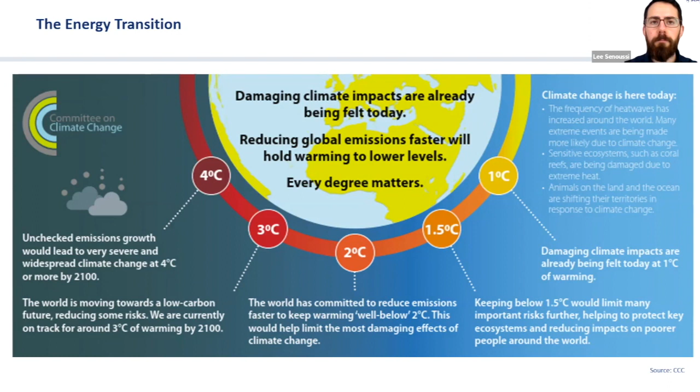I mean, you could say that the UK is a relatively low emitter of greenhouse gases on a global scale compared to the likes of China, USA, Russia, and that the steps that we take are insignificant in the grand scheme of things. However, my opinion is that over the course of history, the UK has been a consistently relatively high emitter of greenhouse gases, and it's up to us to show our pioneering spirit and lead the way in this energy transition.

And this is exactly what the representatives of the UK and Scottish governments are doing. Last year, the Scottish, Welsh and UK governments were among the first to declare a climate emergency and followed this through with commitments and legislation to reduce greenhouse gas emissions to net zero by 2050, or 2045 in Scotland.

Now, this sounds like a very tough ask for a nation that emits over 350 million tons of CO2 equivalent every year. But the good news is that we've already reduced our emissions by over 40% since the 1990 levels, whilst growing our GDP by up to 78%.

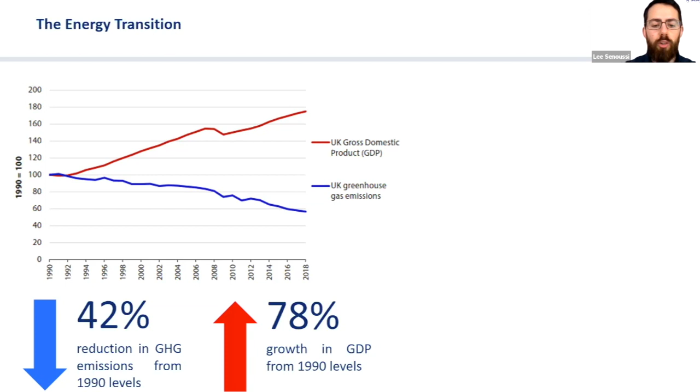So by being a front runner in this movement, we can become a nation, a leading nation with knowledge, skills, and technology that we can export globally. This is a strategy that's already been recognised by Oil and Gas UK and outlined in their Roadmap 2035, and it's further highlighted by the formation of groups such as the OGTC's Net Zero Solution Centre.

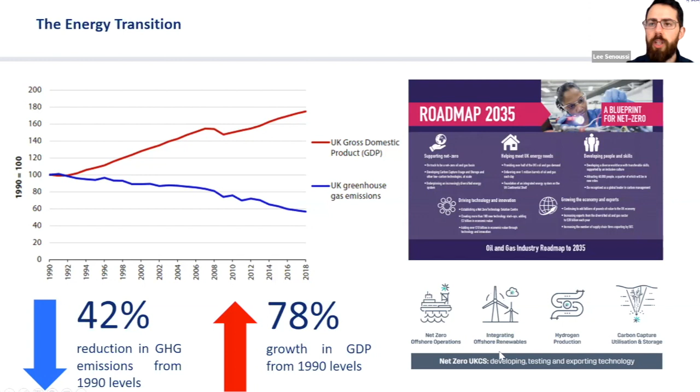So these 2 points on the left, the net zero offshore operations and integrating offshore renewables, are where I'm going to focus my presentation today. So taking a slightly closer look at the UK's oil and gas industry, the production of hydrocarbons accounts for almost 3% of the UK greenhouse gas emissions. That's over 14 million tonnes of carbon every year. And almost 3/4 of this comes from power generation.

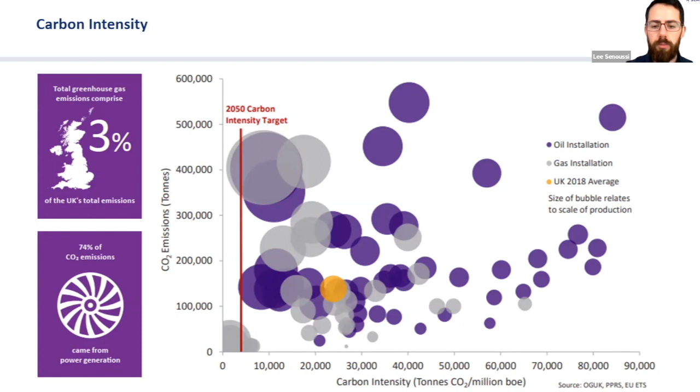The average, shown by the orange bubble, for the UK continental shelf is 21,000 tonnes of CO2 per million barrels of oil. So this is higher than the European average, which is around 11,000, and even the global average at 18,000. When we compare this to our Norwegian neighbours, they produce oil at an average of 9,000 tonnes per million barrels of oil. And this excludes the recently commissioned Johan Sverdrup field, which will bring this average down even further. The red line in the graph shows the target for the UK oil and gas industry, which is to reduce our emissions to 4,000 tonnes per million barrels of oil.

Okay, so this brings me nicely on to what I'm going to talk about today. So as Roger mentioned, last year, in conjunction with the OGTC Net Zero Solution Centre and its members, Sealand studied a cross-section of major oil and gas assets within the UKCS to understand more about the power generating challenges involved in extending the life of the viable assets beyond 2035.

So we explored 3 different case studies. The first investigated the immediate gains that can be achieved by increasing the operational efficiency of one's own generating plant. So this involved completing a cost-benefit analysis to interconnect 2 North Sea assets against a number of COP dates. The second study looks at providing autonomous power to the oil and gas facility by developing an adjacent offshore floating wind farm. As well as performing an assessment on the technical, environmental, and consenting, we investigated the life cycle costs of this method, allowing us to compare levelized costs with the platform's current mode of operation.

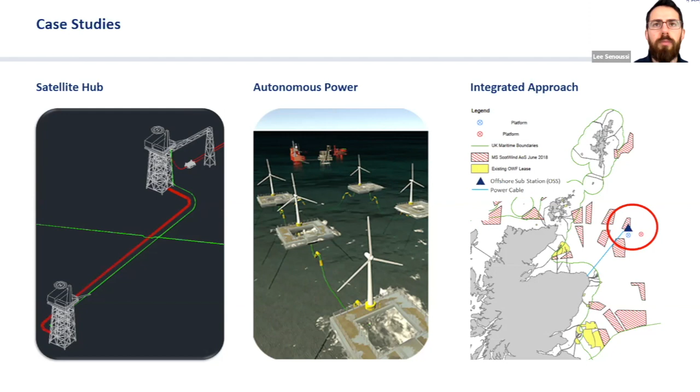Third and finally, we looked at the outcomes from the autonomous power study and drew up a hypothetical scenario in which we applied a more integrated and phased approach that could provide cross-industry benefits. So starting with the first one. So here we took 2 North Sea oil platforms located approximately 10 kilometers apart. They were in the fortunate position to be rich enough in fuel gas that they could power their gas turbine and diesel generators from this.

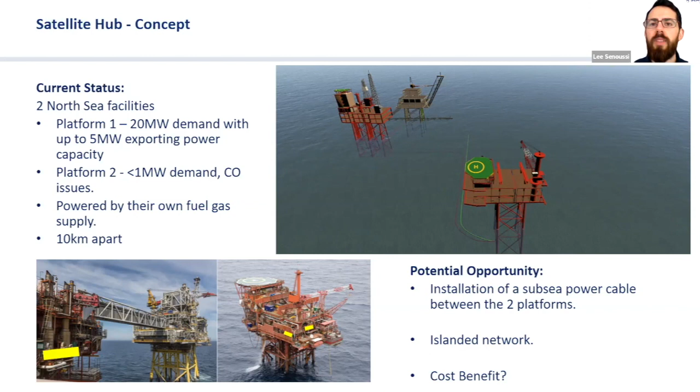Platform 1 is a larger platform with a demand in the region of 20 to 30 megawatts and an excess generating capacity that allows it to export up to 5 megawatts of power. Platform number 2 is a smaller platform with a demand of less than 1 megawatt. This platform's also got some known HSE issues in the form of carbon monoxide emissions, which are a result of the gas turbines. So the operator here wanted us to consider the relative costs of replacing the gas turbines on the second platform with a potential opportunity to install a subsea power cable between the 2 platforms, making use of the overcapacity of the first platform and creating an islanded network. And the question is, could this be of a cost benefit?

So our assessment showed that the solution could be implemented within a 2-year time period from concept to operation. And in terms of costs, we modeled 2 scenarios. On the left, scenario 1 accounts for a cessation of production of 2026, which was modeled to reflect the calculated return on investment of 5 years at a capital expenditure of 7.7 million.

On the right-hand side, we looked at a second scenario which pushed production out to 2031, giving 10 years of operational field life for the cable and a cost saving over that lifetime of around 7 million.

So in terms of some of the challenges and benefits of this option, providing a seamless transition to the new power source was always going to be a challenge in minimizing the operational downtime from switching between one source to another. This option also needs a number of topside modifications, including step-up transformers and modifications to switch rooms and electrical components, which needs available deck space, which is a bit of a premium on these platforms.

Additionally, there's a bit of an appetite to risk within the oil and gas industry, and it's generally thought that some sort of backup generation would be required in case there's a fault with this power cable.

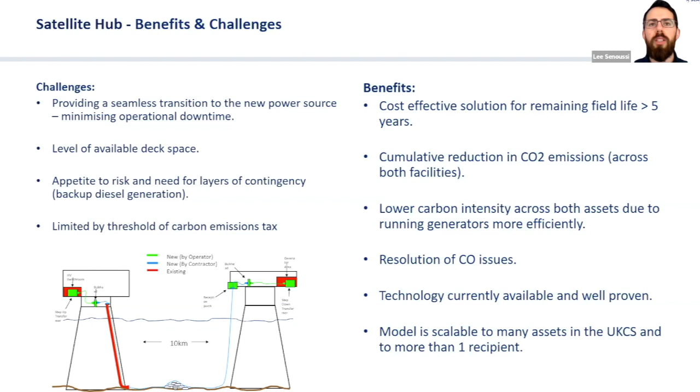So the second case study looked at 3 North Sea assets that are around 160 kilometers from shore. Now they've got a peak power demand in the region of 40 megawatts, and they're all powered by gas turbine generation. However, in this case, the facilities are gas deficient, so they're reliant on the importation of fuel gas, which is costing them a significant 30 to 40 million pounds a year.

Combined, the fields emit almost 500,000 tons of CO2 every year, and our study here investigates the potential opportunity to develop a floating offshore wind farm adjacent to the oil and gas assets, capable of powering some or all of the platform's power needs. Yeah, and we try to answer the question, can this be cost competitive?

So this slide here shows a typical timeline for the development of a floating offshore wind farm based on industry data. We also engaged with the developers of some of the demonstration sites for floating offshore wind, and the feedback we got is that this timeline is actually quite ambitious, and it's typically 8 to 12 years is what we're looking at. This can be down to the long regulatory consenting and approvals processes that are needed, generally within the first 2 to 4 years.

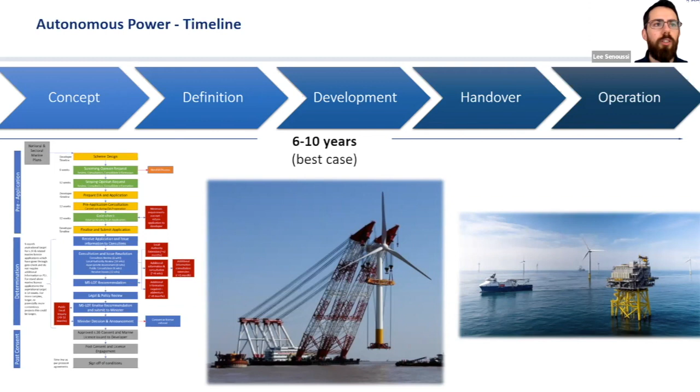Okay, so first of all, I'm just going to focus on the current operating costs of the platform. So this is current operating costs using the gas turbine generators as they are at the moment. So we were able to determine a baseline levelized cost of electricity for the platforms, calculated at £157 per megawatt hour, which I've highlighted in the table there.

So that's our baseline levelized cost, but we also recognize that there are key sensitivities that can cause this baseline value to fluctuate higher and lower. So the first one is the price of gas. The spot price of gas fluctuates throughout the year, and typically operators who are reliant on fuel gas pay anywhere between 1.5 to 3 times the national balancing point of gas, which at the time of the study was about 35 pence per therm.

So the operators are paying a lot of money for their imported fuel gas. And the second aspect is the cost of carbon tax. So we completed this study based on the cap and trade scheme in line with the EU emissions trading scheme, the EU ETS, which showed a rise in carbon tax periodically.

So since leaving the EU, however, we will have to develop our own legislation for how to manage carbon tax. For the moment, it's been set at a relatively low £16 per tonne for the interim period. However, with the country's drive for net zero, this is almost certain to rise, which will have a big impact on some of the larger oil and gas operators. And, for comparison, when we compare this to Norway, at the moment their carbon tax is set at €80 per tonne.

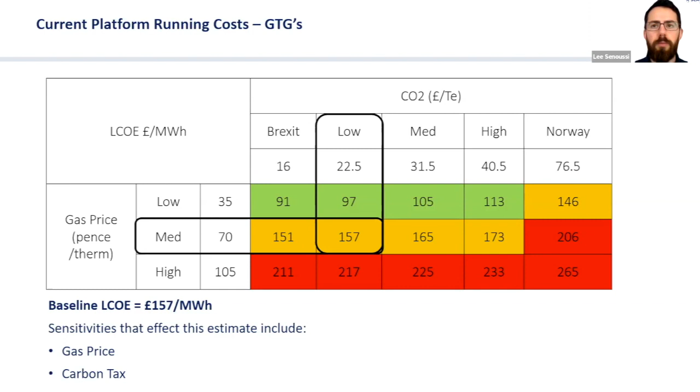Okay, so the question here is, how does our floating offshore wind development compare to our current baseline costs? So in the top right corner, I've kept the current levelized cost for the platforms as they are at the moment for a comparison. And then in the table in the middle, tried to show some of our workings. So first of all, we calculated the capex costs for the development of the 6 10 megawatt wind farm, which we worked out as roughly £350 million. We apply this to an operational timeline of either 10 or 25 years, and then we can calculate the levelized cost in a range of between 170 to 250 pounds per megawatt hour.

So there's quite a large variation, and it can be attributed to the weighted average cost of capital. So essentially, this is a figure that reflects how much risk the financiers consider the development to have. The other factor is the operational time. So with a longer operational timeline, it provides a longer period to realize the benefits and bring down that levelized cost. The bottom 2 rows in the table work back from a levelized cost of £157 per megawatt hour. And the idea of this is to demonstrate the capital expenditure for the development in order for the development to be competitive.

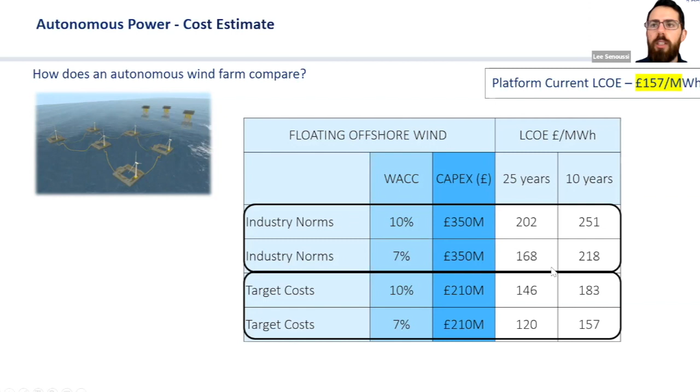So the next slide, which I won't go through in great detail, shows a breakdown of our capex costs and identifies some of the key areas for potential cost reductions to achieve a more competitive levelized cost. These slides will be made available after the session for you to look at these figures at your leisure. But essentially, what we've identified is the foundations and mooring systems are some of the high cost potentials that we think could be improved.

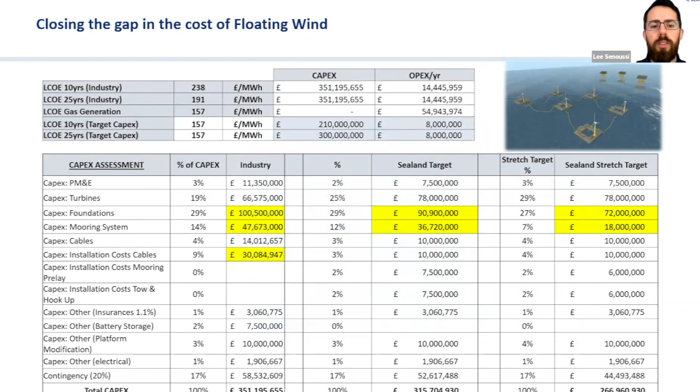Okay, so this one is just a quick slide here to show where we currently are with floating offshore wind and the ambitions of Equinor, who are on a mission to become the first developer to develop a commercial scale floating wind farm. So they're targeting a levelized cost of between 40 to 60 euros per megawatt hour by 2030, which is very ambitious. And it's actually in line with what we're currently seeing for fixed bottom offshore wind farms at the moment.

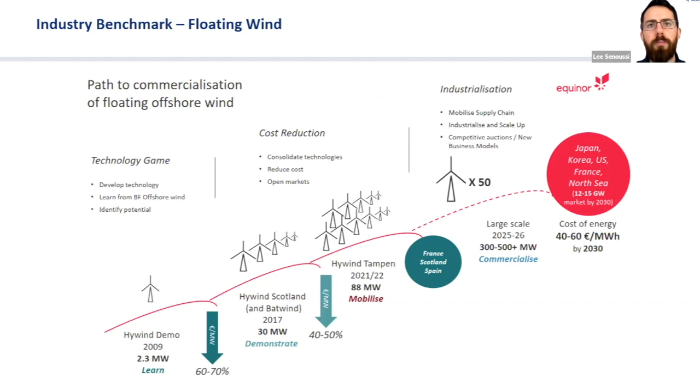So again, talking through some of the benefits and challenges of this option, the obvious benefits are the displacement of CO2. So we're talking, for this case study, around 350,000 tons of CO2 displaced every year. That's about 80% of what it's currently running at, bringing down the carbon intensity in line with net zero strategies. It also gives oil and gas operators an opportunity to expand their portfolio into the wider energy sector if they were thinking about developing into offshore wind. In the coming years, there may be potential government funding that could support these new low carbon methods. And as the technology continues to grow, this will help to drive down the cost of the development.

On the other side, the challenges associated with this option: at the moment it is a high capital investment, which results in a higher than baseline levelized cost. The long timeline for development doesn't lend itself well to oil and gas, who generally need power within the next sort of 5-6 years. The approvals and consenting process between who would own the licenses, oil and gas, Crown Estate, OGA, is a bit uncertain at the moment, untested, and it's waters that will have to be passed through during the process, and it will no doubt add a little bit of time onto the whole process.

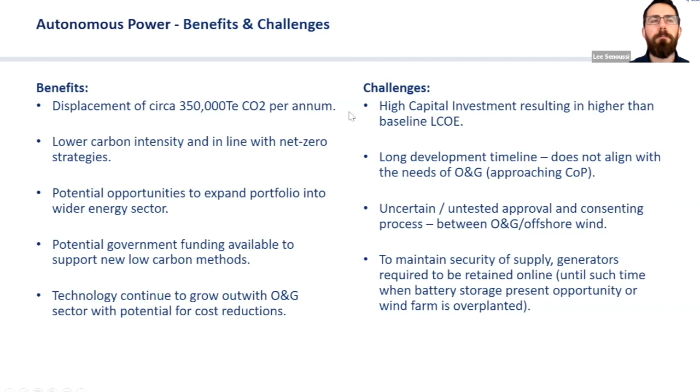So our third and final case study here looks at a scenario which actually stemmed from the autonomous power study, and tries to address the challenges in providing a secure and constant power supply to the oil and gas platforms. So at the moment, this is purely hypothetical, but in this case study, we've adopted a more phased approach to align with the potential offshore wind development in the future licensing rounds. So for the purpose of this study here, we looked at the ScotWind licensing round and recognized that many of these target areas are positioned in deeper waters further from shore, aimed to promote development of offshore wind.

So the first phase would involve putting in a direct power cable from shore to an offshore substation and distributing this locally, as I presented in the first case study, to oil and gas assets. This cable could be AC or DC depending on the required transmission distances from shore. And there is also potential for the offshore substation to be a repurposed oil and gas platform.

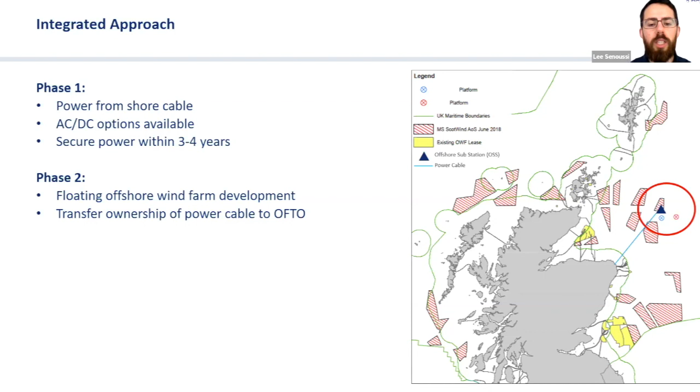The second phase expands the development further into building a commercial scale floating offshore wind farm that ties back to the existing offshore substation and export cable that we've put in previously. The ownership of the cable can then be handed over to the offshore transmission owner, the OFTO, and the oil and gas platform will be provided with a power takeoff from the offshore wind farm.

So this has got a number of benefits to both oil and gas and offshore wind. So the big one for the oil and gas is that they're getting a security of supply. They'll have a constant power supply from the onshore grid. Again, it'll lend itself to reducing carbon emissions and carbon intensity. The timeline is more akin to what the oil and gas industry needs. You'll have power within the next 3 to 4 years. And there's also a potential opportunity to get a return on the initial investment of the power cable if it's transferred over to the OFTO. And then finally, there's also a potential for repurposing one of the oil and gas platforms into that offshore substation.

In terms of benefits to the offshore wind sector, for anyone looking to develop in this area, there's an existing export route already established that they can tap into and export power to shore, which will lead to accelerated development timelines, and it means they can bring production on stream earlier.

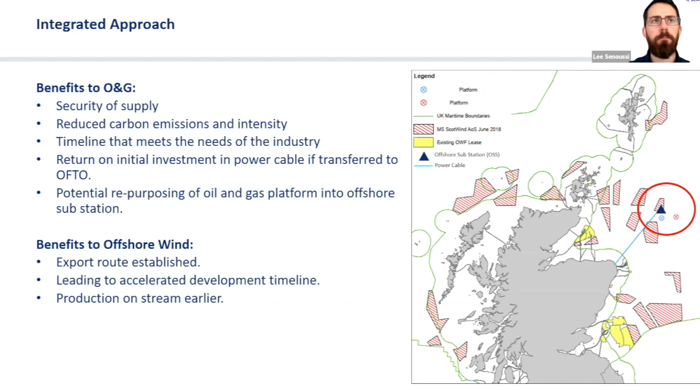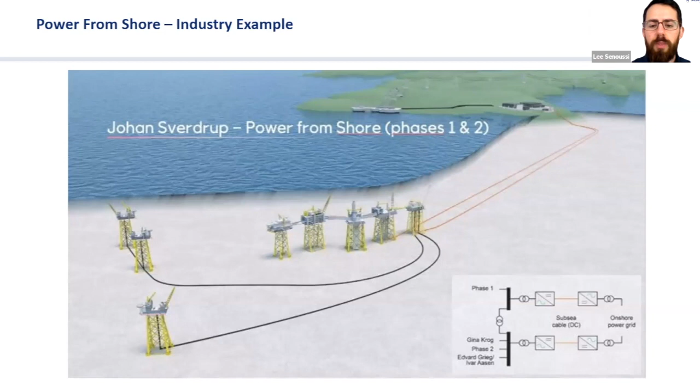And then finally, moving on from these studies that we've done, we're now looking at a couple of further case studies in the North Sea, exploring the potential further for power from shore in a bit more detail, and also including a scenario for tying in a cluster of oil and gas platforms back to an existing fixed bottom offshore wind farm. We're also engaging with Round 4 and ScotWind offshore developers to explore the opportunity of a local power takeoff to oil and gas through power purchasing agreements, and also engaging with power cable suppliers who are keen to develop solutions that fit the needs of our industry, whether that be AC or DC supply.